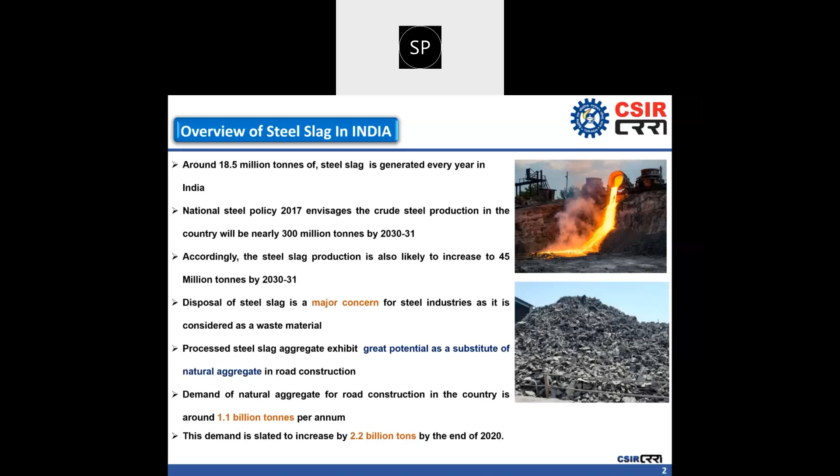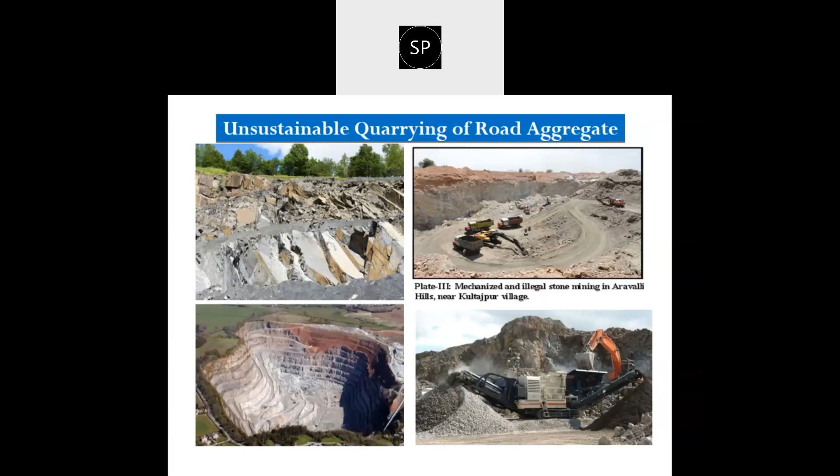So what we can do in this area is find out alternate materials or marginal materials which can be utilized in road construction work as a substitute for natural aggregate. In order to give you a brief overview, in the iron and steel industry normally three types of major slags are generated. The first one is blast furnace slag, which is generated during the conversion of iron ore into pig iron inside the blast furnace, therefore it is termed blast furnace slag. Slag is primarily the impurities which accumulate on top of molten iron in the form of a flux, and it is tapped from the furnace at around 1500 to 1600 degree centigrade temperature.

Subsequently, it is subjected to air cooling, through which we can have different types of slag based material like air cooled blast furnace slag, expanded blast furnace slag, pelletized blast furnace slag, and granulated blast furnace slag. Among these four types, the major two are the air cooled blast furnace slag and the granulated blast furnace slag.

If the blast furnace slag is air cooled, then it can become a source material as a substitute of natural aggregate in road construction.

And if it is granulated with the help of water quenching process, then it gets converted into granulated blast furnace slag, and this type of slag can be directly utilized for the production of Portland slag cement, PSC. As per the advent of new IRC code, 30% replacement of OPC has been permitted by using ground granulated blast furnace slag in pavement quality concrete, PQC.

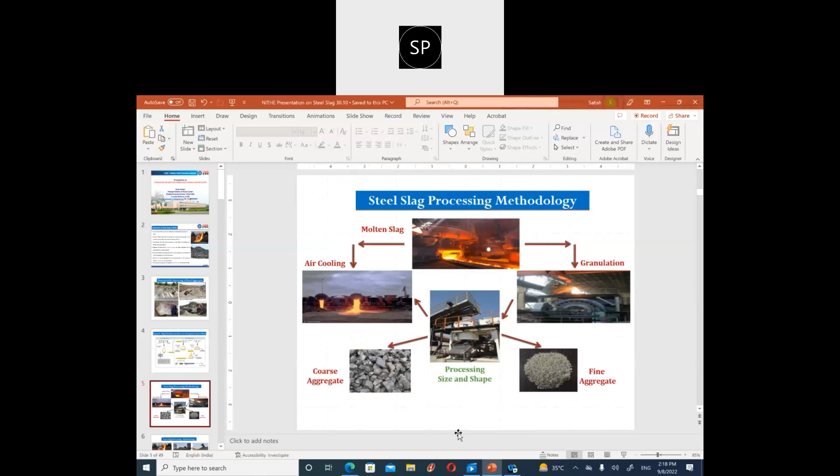Now the hot metal from the blast furnace goes into the steel furnace, where this hot metal gets converted into mild steel, and based upon the type of furnace employed for production of steel, this slag can be classified as basic oxygen furnace steel slag and electric arc furnace steel slag.

During this process, all these impurities accumulate on top of the molten iron in the form of a flux, and it is tapped from the furnace in molten form at 1500 to 1600 degrees centigrade, and subsequently it is air cooled. Once it is air cooled, it becomes basic oxygen furnace steel slag, which is a good potential material for utilization as a substitute of natural aggregate in road construction.

In similar fashion, there is another version of furnace called electric arc furnace. The major difference between the basic oxygen furnace and electric arc furnace is the method through which the arc is inserted inside the furnace, through three electrodes in the electric arc furnace process.

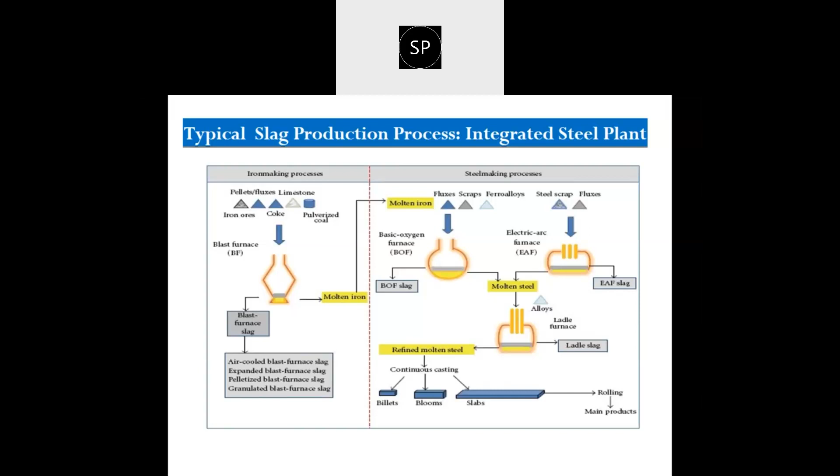Here is a glimpse of the entire process carried out inside the steel plant. In the first photo you can see the molten slag coming out from the furnace, tapped from the bottom. Later on, it is transported to the slag pit, where air cooling is carried out.

Once it is air cooled, magnetic separation and crushing may be required depending on the type of slag generated in the slag pit, and subsequently it can get converted into a coarse aggregate. Now the other method to process the slag is granulation.

In this process, molten slag is poured directly into the granulator, where through water quenching the slag is converted into sand sized particles, called granulated slag. Normally this process is employed on blast furnace slag, the slag generated inside the blast furnace during production of pig iron from iron ore.

This blast furnace slag can be utilized in the form of fine aggregate, and if it is further ground, it can be used as ground granulated blast furnace slag, which due to its high hydraulic activity can be utilized as a direct replacement of cement in pavement quality concrete.

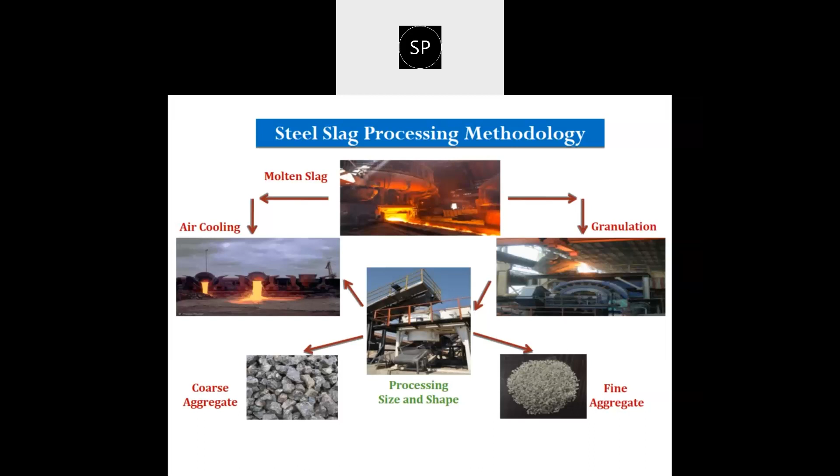This particular slide depicts the entire process, how it can be done. The molten slag is poured into the slag pit, where it is air cooled, and there is a significant scientific methodology involved in air cooling the slag so that the different intrinsic properties required for utilization of this material as a road aggregate can be developed.

CSIR CRRI has recently developed the steel slag valorization technology, which has been given to different steel industries like ArcelorMittal Nippon Steel, JSW Steel, Tata Steel, and Rashtriya Ispat Nigam Limited, in order to convert steel slag as a road making aggregate. Once this slag is air cooled, it is transported in a dumper from the slag pit to the slag processing facility, where it is subjected to crushing and magnetic separation to remove the metallic iron content, and subsequently the slag aggregate can be prepared using it.

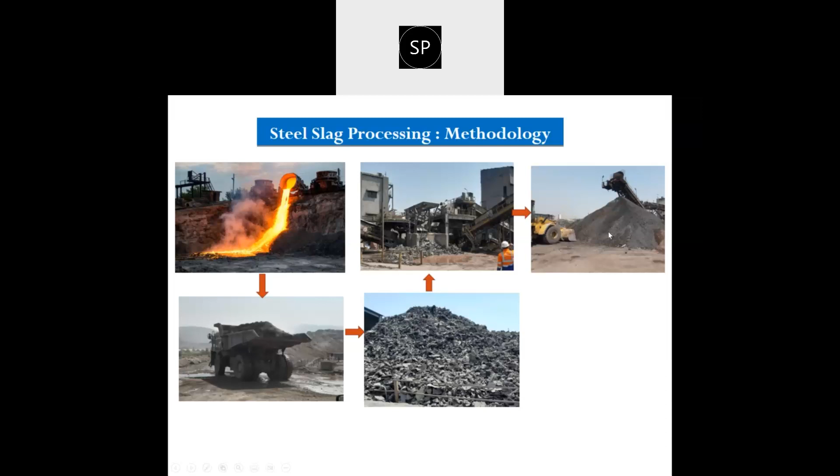Now in terms of the application, if you will see... my slide is changing. Am I audible to you? Hello. Yes, sir. Hello, sir. Be continuous.

Okay, so right now I am on types of iron and steel slag and potential uses. These are the different types of slag generated out of different types of furnaces. One is the blast furnace. The slag originating from the blast furnace can be used as air cooled blast furnace slag, and as discussed, it can be granulated in the form of granulated blast furnace slag, which can be utilized as a replacement of sand.

And if it is further ground, it becomes ground granulated blast furnace slag, which has highly cementitious and hydraulic properties. Therefore, it can be used in the manufacturing of Portland slag cement, as well as this material can be directly utilized as a replacement of OPC cement in pavement quality concrete.

Now the second stage, steel slag, is primarily of two types: basic oxygen furnace steel slag, and electric arc furnace steel slag. This basic oxygen furnace steel slag can once again be air cooled and granulated. Through the granulation process, we can develop the cementitious characteristics inside the granulated steel slag.

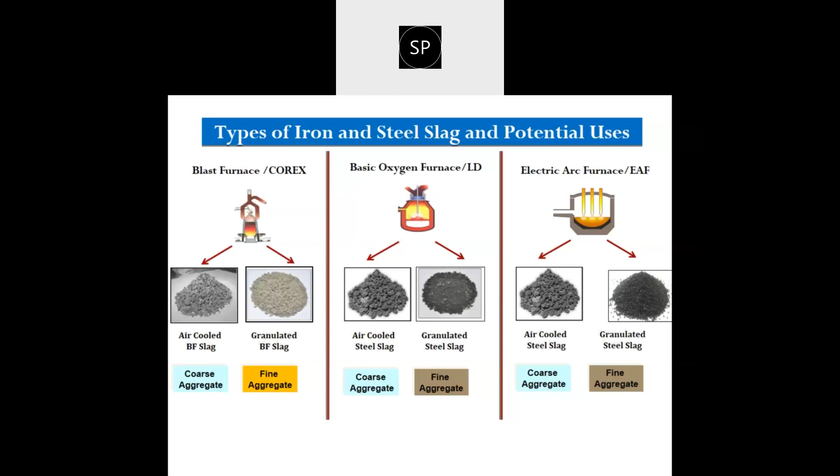Now as far as its application is concerned, blast furnace slag, being a coarse aggregate, has very less generation nowadays, since the majority of blast furnace slag is normally granulated in the form of granulated blast furnace slag, and further ground into GGBFS, which has good export characteristics. Besides that, it can be directly utilized as a replacement of cement. So the majority of steel industries across India are converting blast furnace slag into ground granulated blast furnace slag as a replacement of cement.

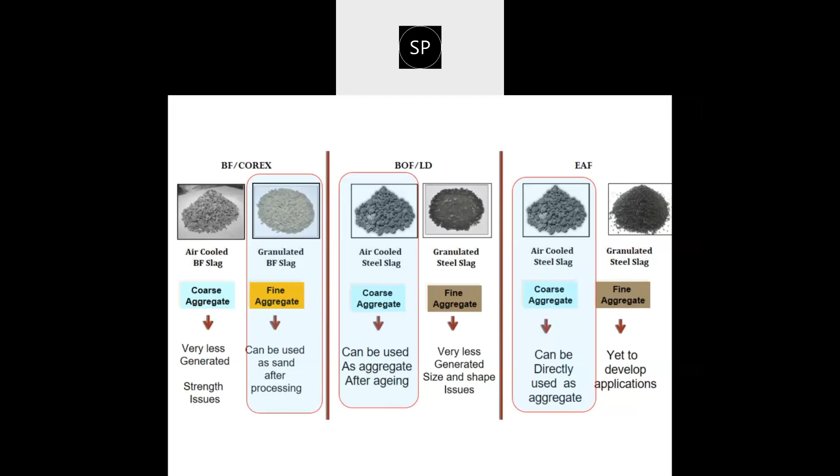The second one is BOF slag, which goes into road construction application as discussed, but requires different sorts of treatments. In my subsequent slide I will share the challenges posed by BOF slag, and what sort of treatments are required for it to be utilized for coarse aggregate application. The third one is air cooled steel slag, which can become a good material for road construction activity.

So what is the process followed? The molten slag is removed from the blast furnace, and then it is put into the granulator, where it is subjected to rapid quenching of water. With the help of this rapid quenching, this blast furnace slag gets converted into sandy particles, and this process is called granulation.

Due to this process, glassy content gets developed inside the granulated blast furnace slag, and this glassy content is normally between 85 to 90% as per IS standard, for its utilization as a replacement of cement in pavement quality concrete. If the glass content is less than 85%, the material will not have the requisite hydraulic and cementitious properties, and therefore all cement manufacturing companies reject GBFS which has glass content less than 85%.

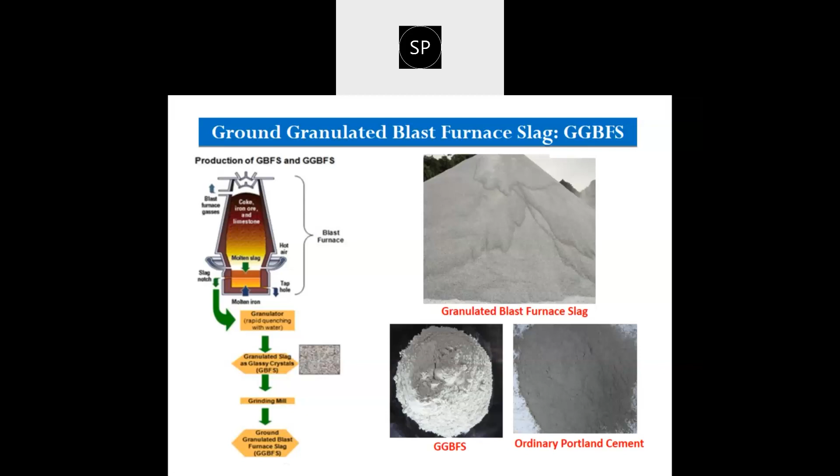This granulated slag is then subjected to grinding in a dedicated mill, and through this grinding process it gets converted into ground granulated blast furnace slag, which has a fineness modulus equivalent to cement, and has very good hydraulic and cementitious properties. With the help of that, we can utilize it as a cementitious binder.

In terms of chemical composition, GGBFS contains 38 to 50% calcium oxide, while OPC contains 60 to 67% calcium oxide. The silica content in GGBFS is normally 27 to 39%, while in OPC it is between 17 to 25%. Magnesium oxide is normally less than 10% in GGBFS, while in OPC it is between 4 to 10%. Aluminium is between 8 to 20% in GGBFS, while in OPC it is between 3 to 8%. So in terms of major chemical composition, GGBFS is more or less similar to OPC, and therefore it shows very good cementitious properties and can be used as a replacement of cement.

So what is the benefit of using GGBFS in cement concrete mix? It offers high strength, reduces permeability since it is a very fine powder that fills the permeable voids inside the concrete mix, and reduces the permeability significantly. It also offers high resistance to chloride penetration, since Portland slag cement shows very good resistance to chloride and sulfate attack.

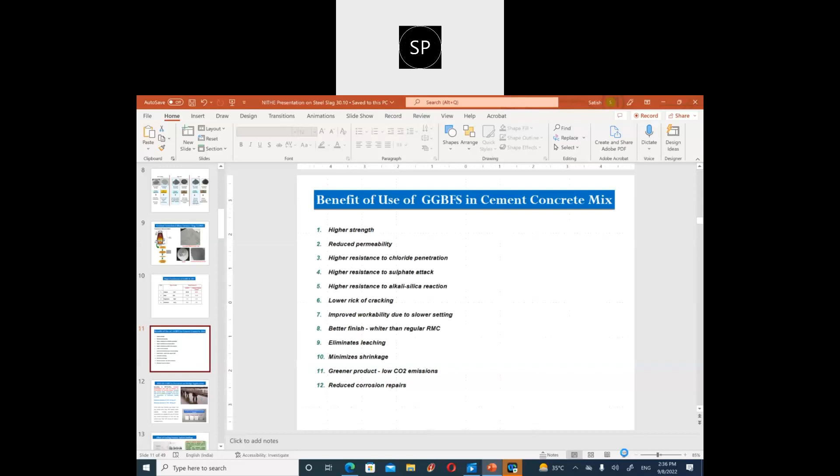Is there any question? I could not hear you properly. Is there any question on the panel? Am I audible to you? Yes, sir. I think somebody is asking some question, or should I move ahead? Please move ahead, sir.

It offers improved workability, and besides that, the chances of shrinkage get minimized since GGBFS contains high silica content in comparison to conventional OPC. So the silica alkali reaction reduces the chances of shrinkage.

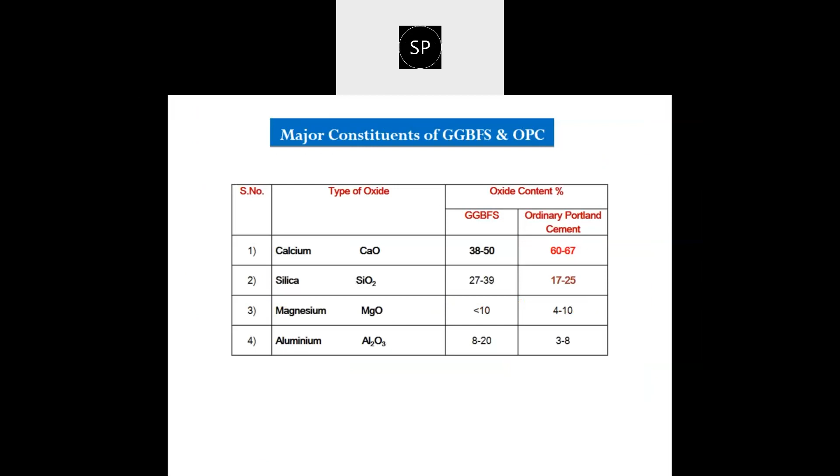It is a green product since by utilizing GGBFS we are facilitating waste utilization in a productive manner. Therefore it offers a carbon credit, and since there is no clinker manufacturing process involved as happens in conventional OPC or PPC cement, this material has low CO2 emission. It reduces corrosion potential, and therefore steel bars or reinforcement placed inside the structure will have longer durability compared to conventional OPC and PPC cement.

According to IRC 15:2011, standard specification and code of practice for concrete road, Portland slag cement containing not more than 50% of GGBFS by weight can be used for the preparation of pavement quality concrete. So the major composition in Portland slag cement is the GGBFS, but its upper limit is restricted to 50%. So any PSC which you intend to utilize should not have GGBFS content more than 50%.

JSW Cement, Tata Steel is producing this Portland slag cement, and recently Ultratech has also started manufacturing it. Particularly in the eastern part as well as in Maharashtra and Karnataka, the availability of Portland slag cement is very good, and it can be utilized as a substitute of OPC and PPC for pavement quality concrete work. The maximum quantity of PSC is limited to 510 kg per cubic meter, while the minimum quantity is prescribed as 360 kg per cubic meter for the preparation of pavement quality concrete.

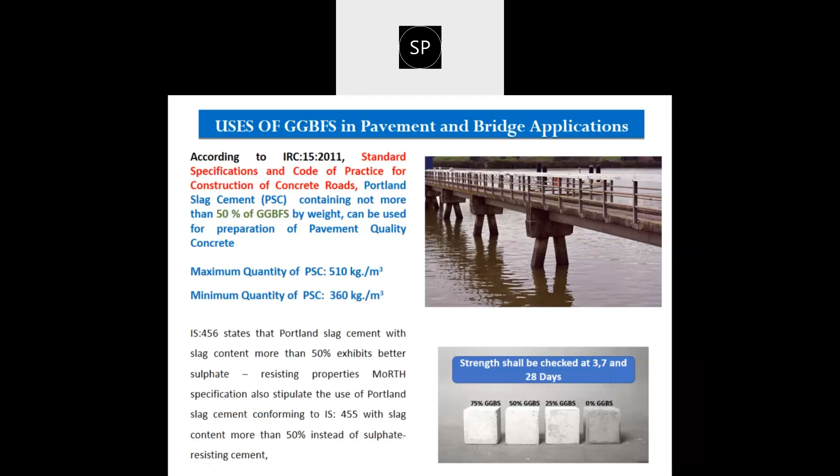Now, as we were discussing, the slag cooling process has significant impact on its properties, and therefore this is one of the scientifically designed processes and methods in order to utilize the slag as a road construction aggregate.

In case of the aggregate obtained from the igneous rock group, Larnite is one of the important minerals found in abundance, and this particular aggregate, like granite, basalt, shows good Mohs hardness. When we want to convert this slag into the form of a road aggregate, this sort of mineral should be maximized, and therefore we developed an entire slag cooling process, with the help of which the Larnite mineralogical phase can be achieved inside the slag aggregate.

This slag cooling process also affects the surface appearance of the slag aggregate, as well as its surface structure, which can be controlled through it.

Fast cooling results, like if we immediately cool the slag by pouring water or spraying a jet of water on top of it, may result in an abrasive surface due to presence of smaller grains at the surface. Besides that, this process also causes a vesicular structure in the slag, which absorbs binder like bitumen binder and cement when we utilize it as a substitute of cement or bitumen inside asphalt concrete or cement concrete. So this vesicular structure should not be there, and the aggregate produced through the process should be as good as conventional natural aggregate in terms of surface appearance.

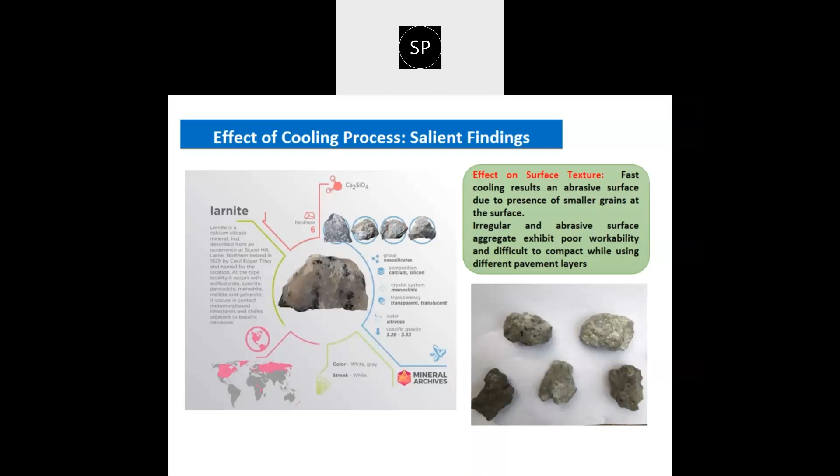The irregular and abrasive surface aggregate exhibits poor workability and is difficult to compact while using in different pavement layers. So if there is an irregular surface structure, we will face difficulty in achieving the desired degree of compaction inside the different pavement layers.

Now where can this kind of material be utilized? It can be utilized into different layers of asphalt pavement as well as cement concrete pavement. It can go into surface course, binder course, base course, sub-base course, embankment, and subgrade. This is a study which has been conducted by CRRI, and all of you might have heard or may be aware about that.

We have constructed a 6-lane, 1 kilometer long steel slag road at Hazira, Surat, by substituting 100% natural aggregate with processed steel slag aggregate. I will show you the photographs as well as video of that particular road which has been built using it. Now, in case of rigid pavement, it can go into pavement quality concrete, DLC, granular subbase, like that.

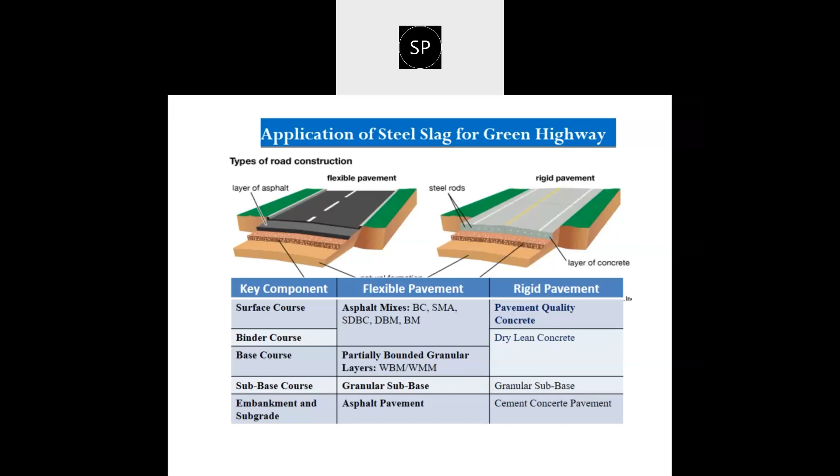And we are utilizing this electric arc furnace steel slag aggregate on Mumbai Goa Expressway on NH 66 near Dolvi, constructing this rigid concrete pavement using steel slag aggregate as a 100% substitute of natural aggregate.

In terms of chemical composition, how steel slag aggregate differs from natural aggregate: good quality natural aggregate obtained from igneous rock groups like basalt and granite normally contains 5 to 10% calcium, while it is full of silica, with silica content between 45 to 50%. In case of steel slag, it will be devoid of silica, between 10 to 20%.

Therefore, steel slag aggregates are primarily calcareous in nature, while basaltic or granite aggregates are basically siliceous in nature. In terms of chemical composition, steel slag aggregate differs considerably from good quality natural aggregate, while the iron content in ferric oxide form, FeO or Fe2O3, is between 10 to 20%, sometimes going up to 30% in some steel slag aggregates, while in basaltic aggregate it is between 5 to 10%.

The manganese content is between 2 to 6%, while manganese content in natural aggregate is negligible, or sometimes not found inside it at all.

One important characteristic is the presence of free lime, and this quantity of lime may cause volumetric expansion in steel slag aggregate. The presence of free lime is significant, particularly in steel slag obtained from the basic oxygen furnace process.

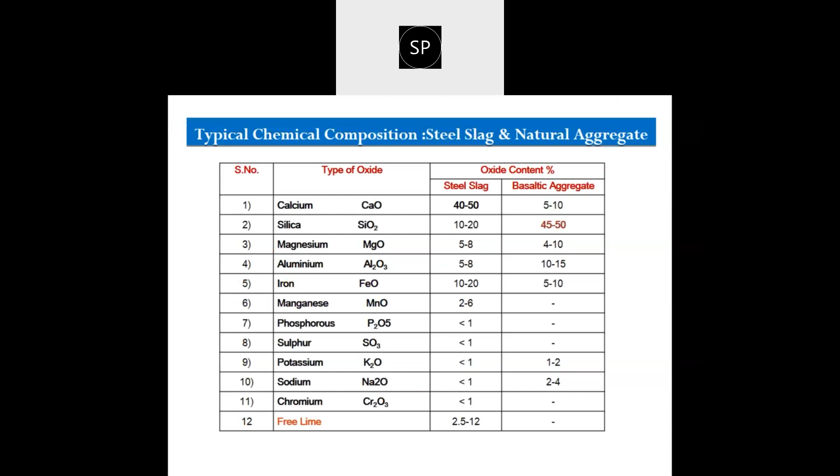That much variation can be seen in specific gravity, depending on the quantity of metallic iron going along in the slag. If there is high metallic iron content entrapped, the specific gravity of the slag will be higher, which can be reduced by removing the entrapped metal through the magnetic separation process.

This is the glimpse of the road we constructed at Hazira, Surat using 100% processed steel slag aggregate. It's a 1 kilometer long, 6-lane road which connects NH6 to Hazira port. Around 1200 to 1500 commercial vehicles per day move on this road, carrying 30 to 40 ton payload. All layers, from subgrade to bituminous layer, are constructed using processed steel slag aggregate. There is no natural aggregate inside this road. Besides that, the road median, road shoulders and side drains too are built through processed steel slag.

This is one of the major significant achievements. Up to partial extent, let's say 20-30% replacement of slag has been attempted under CRRI supervision on different projects, and we delivered those projects back in 2015-16. But in 2021 this project was completed, and in this particular work we utilized 100% processed steel slag aggregate as a substitute of natural aggregate inside the road.

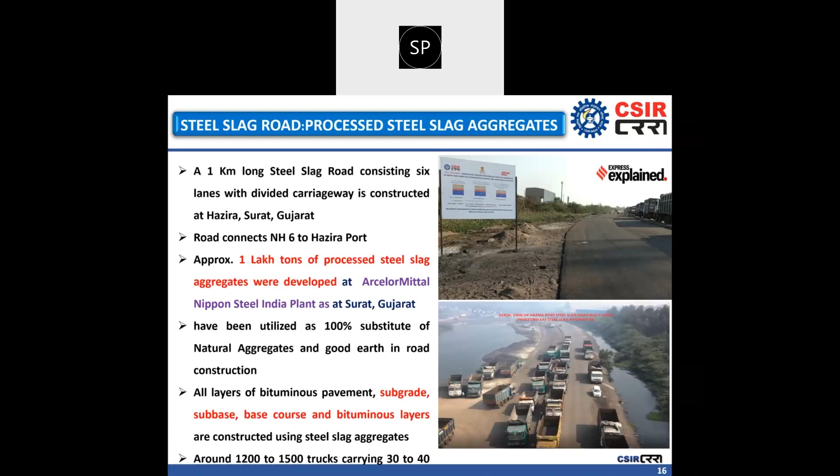For the last 1 year we are monitoring its performance, and we found it as good as the national highway in terms of riding quality and serviceability parameters, with equivalent or better performance than conventional roads. This is the aerial view obtained through the drone on this steel slag road.

This is the quality of road which has been built. This is a 6-lane road. The road median, all the lanes, and even the side shoulder and roadside drains are constructed using processed steel slag aggregate. This particular road was in quite dilapidated condition.

It is situated on marine soil, adjacent to the Hazira port. It's a big commercial port where goods of Reliance, L&T, ArcelorMittal, and ONGC move through this section for the port, and due to that this road had developed big potholes, with several layers completely worn off. We took this challenge and designed this entire road using slag aggregate, and now for 1.5 years this road is completely intact despite being subjected to very heavy commercial traffic.

We carried out an axle load survey on top of it, and found that the axle load on this particular road is between 26 to 32 tons, which is the heaviest traffic we have witnessed in any section. Despite that, this road has not developed any potholes so far. There is no sign of distress in it, and it is perfectly intact.

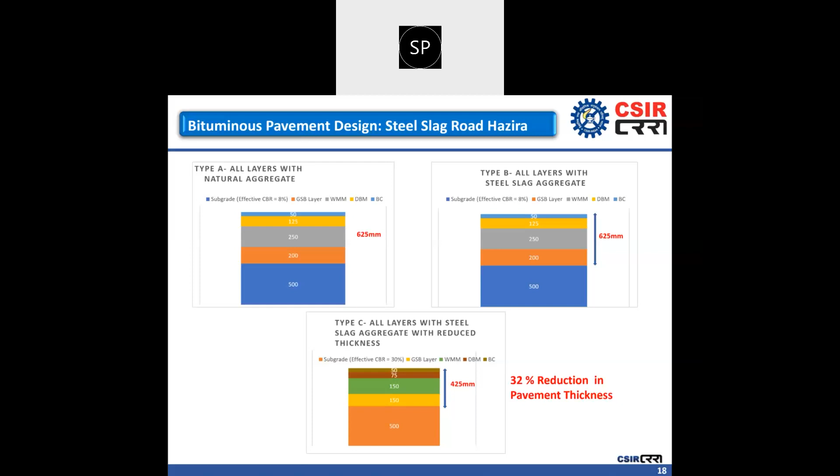All three sections are completely instrumented, and we monitored the stress, strain, and deflection underneath the load in these three sections. We found that the fatigue and rutting strain get reduced considerably once the section is built through processed steel slag aggregate. Here you can see the structural evaluation carried out through a heavyweight deflectometer on the steel slag road section.

One important finding of this study is that in case of the conventional road, at 40 kN impulse load, the deflection is around 260 to 371 microns, and this deflection is reduced to 50 to 60% when we tested it on the steel slag road section.

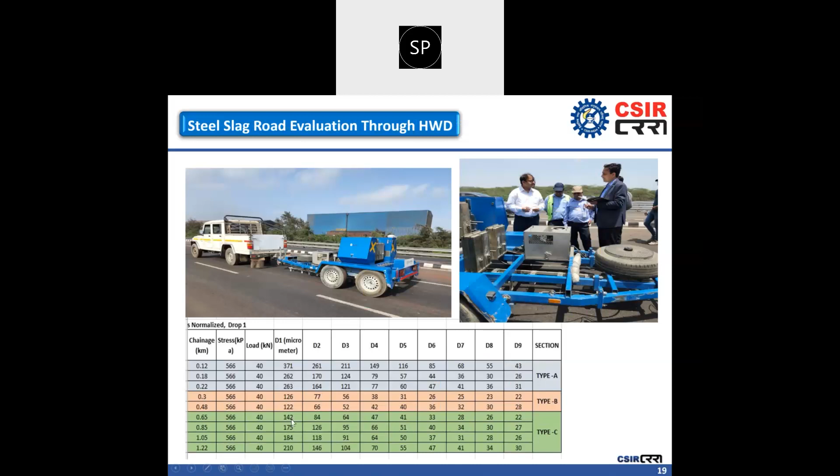Type B is with the conventional thickness and type C is with the reduced thickness. Despite having 32% reduced thickness in the pavement, the steel slag road is showing significantly lower deflection under impulse loading. By virtue of that, we achieved the highest structural stiffness inside the road.

In this graph, you can see the steel slag road's comparative deflection bowl from D1 to D9 sensor in an inner lane. The highest deflection is around 1,000 micrometers, and this deflection gets reduced to between 375 to 400 micrometers — almost a 60 to 70% reduction in surface deflection, which is primarily the cause of fatigue and rutting strain in the pavement.

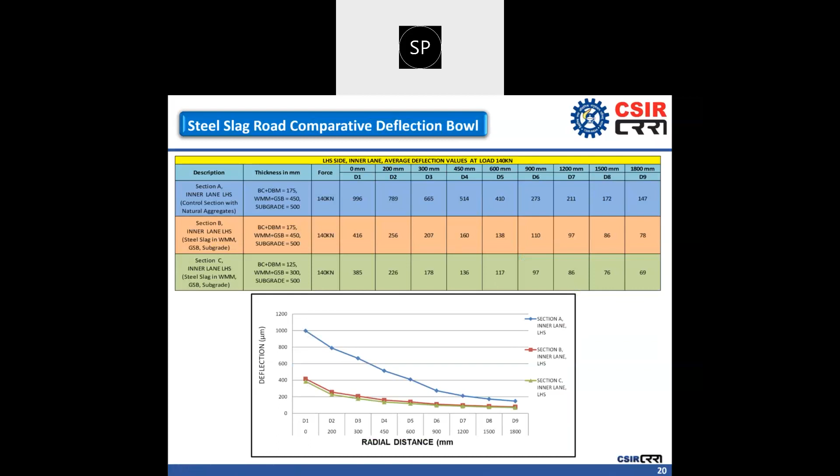By virtue of that, the design life of this particular road, found through the back-calculation method after heavyweight deflectometer evaluation, is between 60 to 80 years in comparison to 20 years as prescribed in IRC 37. So it's a highly durable road which has been constructed using 100% processed steel slag aggregate in comparison to natural aggregate.

Now, what are the challenges associated with the steel slag utilization?

As we discussed in the previous slide, the steel slag contains free lime, which can cause volumetric expansion if the untreated slag is utilized for the preparation of bituminous mix, or it is utilized in the unbound or granular layer. In order to reduce this free lime content to less than 3 to 4%, we have to subject the steel slag to alternate weathering or aging treatment. With this treatment, we can reduce the free lime content to less than 4%, which indirectly reduces the potential of volumetric expansion. When volumetric expansion is less than 3%, this material can be utilized for road application.

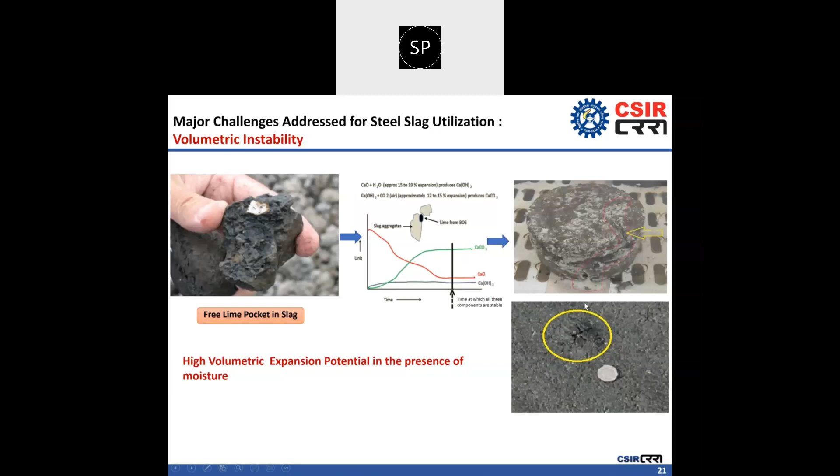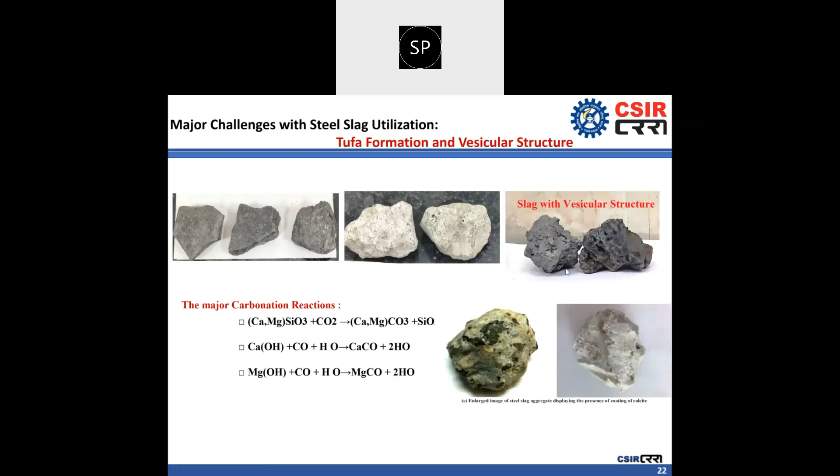So these are the two important aspects. The fourth one is high metallic content. If the slag aggregate contains high metallic iron, this metallic iron will corrode with time, and the slag aggregate will have this corrosive appearance after 1 or 2 years. Before its utilization, the slag aggregate should be subjected to magnetic separation in order to remove and trap the metallic iron from the steel slag.

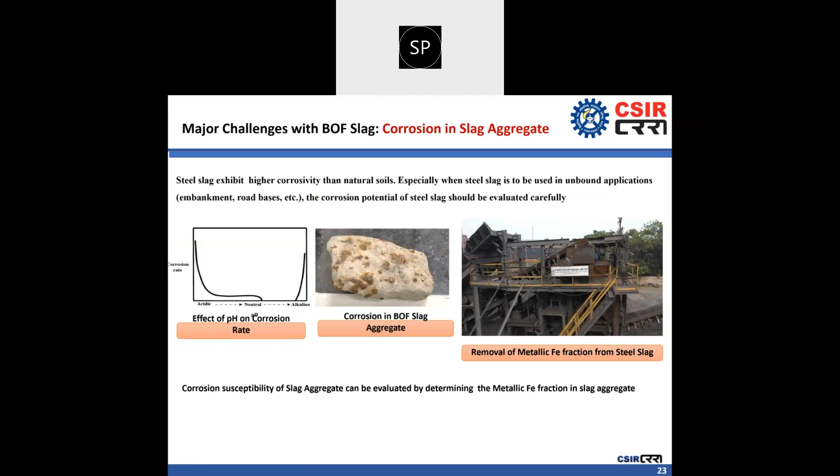CSIR-CRRI has customized this particular process in order to bring down the metallic iron content to less than 4%. Whatever metallic iron is recovered from the slag is basically recycled in the steel plant to produce steel. This is a glimpse of the metallic iron removal process which you can see in this particular slide.

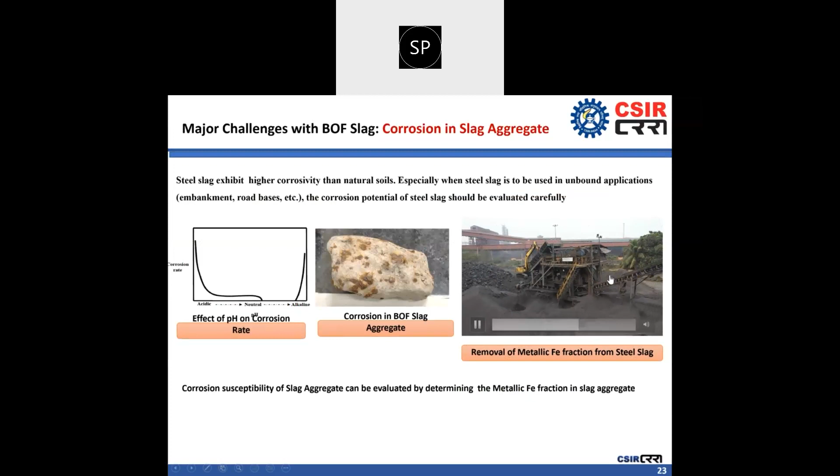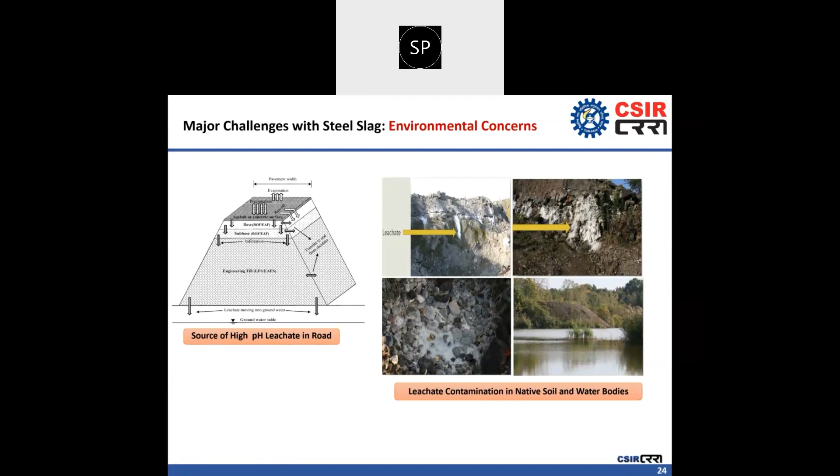So this high pH leachate or heavy metals can reach up to the water bodies and cause negative impact to the local human beings as well as the marine environment. Therefore, it requires treatment before its application.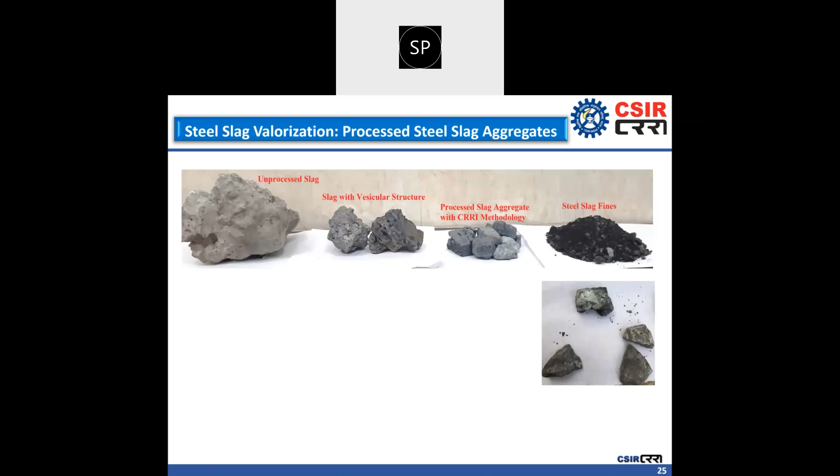So this is a glimpse of the steel slag processing methodology. This is the unprocessed slag, and this is the slag with vesicular structure. Now this is the converted steel slag achieved through the CRRI process. In terms of appearance, surface appearance, as well as physical and mechanical properties, these aggregates are equivalent to good quality natural aggregate, and even giving us superior mechanical performance.

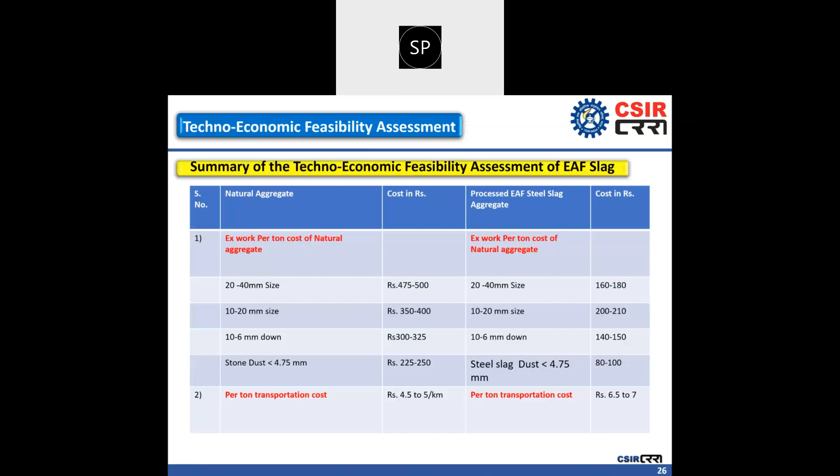Besides that, the per ton transportation cost is slightly higher in comparison to the conventional aggregate, since it is a bit heavier than the conventional one. The per ton transportation cost will be between 6.5 to 7 rupees per kilometer, while it is 4.5 to 5 rupees per kilometer for the natural aggregate.

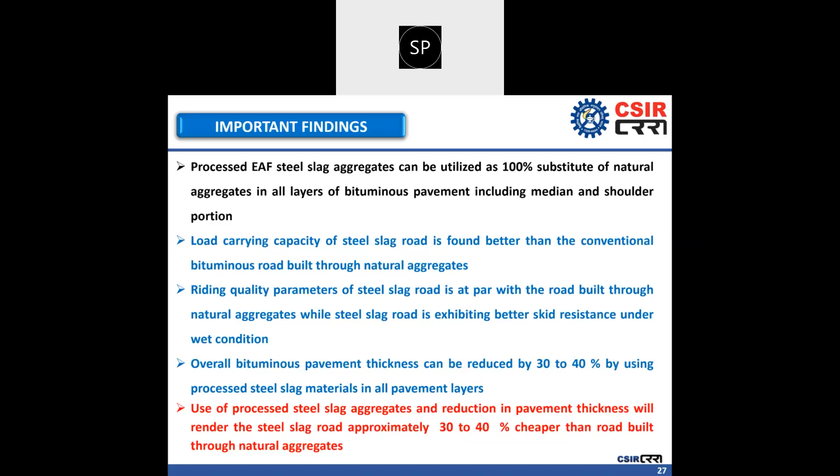So use of processed steel slag aggregate, which at the primary instance is cheaper than natural aggregate, combined with the reduction in pavement thickness, means we can construct an asphalt road 30 to 40% cheaper than a road built through natural aggregate. In terms of economics, this material will offer you a cost-effective option to construct a steel slag road at 30 to 40% lower cost than the natural aggregate section. So now we will take a 5 minute break and then I will discuss the second part.

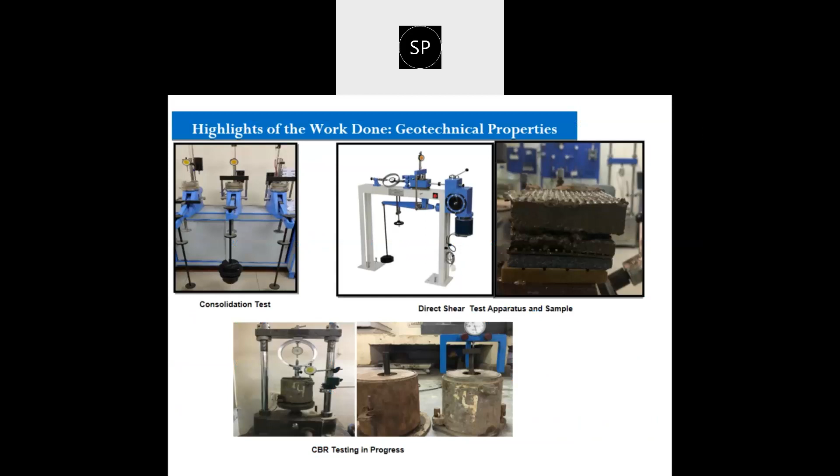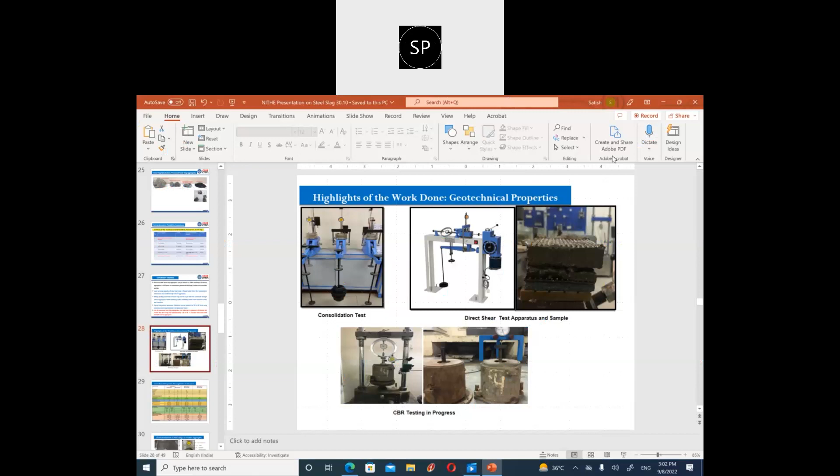Am I audible to all of you? Since I cannot see the face of anyone, it is very difficult to connect. Yes sir, you are audible. So now we will continue the second part after a 5 to 10 minute break. Okay, sir. Thank you.